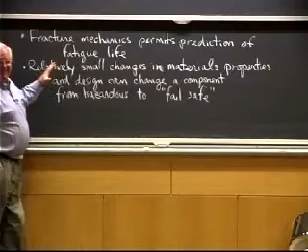I don't care. Fracture mechanics permits the prediction of fatigue life, which we went through last time. Prediction of fatigue life and other types of below-yield fracture is very important because you've got to figure out on what basis you're going to retire a structure from service. I'll talk about that in a bit.

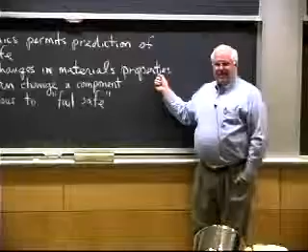But I also gave you the example of the hydraulic cylinder from the America's Cup yacht, where relatively small changes in the material's properties, changing the heat treatment so that the yield strength went from 73 KSI to 63, and the fracture toughness went from 26 to 30 KSI square root of inch, and the wall thickness went from 3 to 4 millimeters.

Those three changes changed the component from something hazardous that could just blast and blow apart in a catastrophic manner, spraying high pressure oil all over and destroying the cylinder so it couldn't operate at all, to one that would leak before break.

And the leak might be small enough that you could still get your sail up and still win the race. Maybe you wouldn't get it up quite as fast, but at least you could get it up. So you'd like things that fail in a safe way.

Now, there's actually a number of different design criteria. One is fail-safe, and another common one is safe-life design. Anybody know the difference between the two?

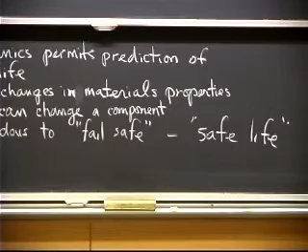Something that fails safe is something that if it fails, the consequences are not catastrophic. For example, if I've got a building with redundant structures, redundant beams, I could lose one of the beams.

In fact, the World Trade Center is not a bad example. They lost some of the perimeter beams when the aircraft went through the outer shell, but the building didn't collapse at that point.

The rest of the beams held it up because it's a redundant structure. There were 262 or 264 beams holding up the building, so if you lost 10 on one side, the building still held up. That was a fail-safe design for the structures.

You have a lot of redundant columns—not beams, I call them beams, but redundant columns—and you could lose a few of them.

One time I had to look at a crack in a 9-foot beam—did I ever tell this story—in the approach to the George Washington Bridge in New York City?

If anyone's from New York City, there are some 20-some story apartment buildings built right over the roadway. If you're driving to the George Washington Bridge, you go underneath these buildings. One time I was asked to come to New York City and look at this 9-foot crack in a 9-foot high beam, one of the beams holding up this building over the roadway.

It was sort of exciting. That particular section of town, I didn't know anything about. I just flew into LaGuardia and took a cab out to the address they gave me. The cab driver dropped me off, I gave him the money, and he sped away. I looked around, and there were all these little plastic capsules all over the sidewalk that had drugs in them. And I'm there with my $3,000 worth of camera equipment over my shoulder, looking around the neighborhood and wondering why the cab driver sped away so quickly.

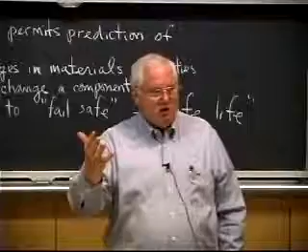But fortunately, it was a redundant structure and a fail-safe design. You could lose one of the beams because there are like 40 of them underneath the building, holding the whole building up. Losing one is not going to bring the whole structure down.

Now, the other thing that's interesting about that story: when they went to tell the tenants about the crack in the beam in the basement, after the meeting, all the tenants wanted to go to the basement and get some of the crack. So, that just tells you a little bit more about the neighborhood.

Anyway, safe life, on the other hand, is when you know that the building or aircraft or car or whatever you're talking about has a component that is going to fatigue, and you can't really design around it.

Let's take a helicopter, for example, or any aircraft. Helicopters, sometimes they say, are flying fatigue machines. They vibrate a lot, and so you get cyclical stresses, and you know that the potential for fatigue and a crack growing is there.

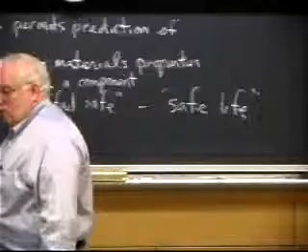And if the crack gets to a big enough size, you want to know about it, and you want to remove it from service before the crack gets too big. Well, that's exactly why these types of plots that I gave you before of crack growth rate are so important.

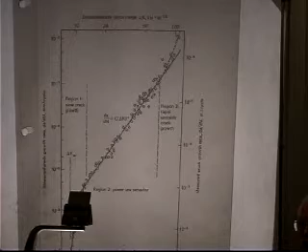Okay, this is the crack growth rate curve, and this goes back to the first one on fatigue. If I know the stresses in the structure, I can predict how many cycles it will take. I just have to integrate this curve, and it turns out you can integrate this curve, and people do it. I've done it.

And you'll find how many cycles it will take, DADN, at a given stress level, for the crack to start from, let's say, 1/8 of an inch in size. Why 1/8 of an inch? Because 1/8 of an inch is a typical flaw size that can be readily detected by most non-destructive testing techniques.

So you take a brand new part of whatever the thing is. What do I have as a part? I guess I'll take a MIT ring, a big MIT ring. So if you have a part, you can inspect it and make sure there are no flaws in it larger than 1/8 of an inch.

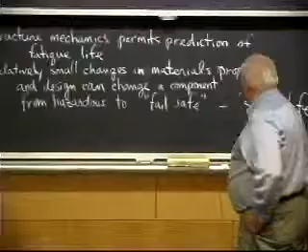You then, if you know what the stress is on the thing in service, can figure out how many cycles it's going to take. You can estimate the number of cycles over a given lifetime, and you can say, okay, I'm going to retire that ring after 40 years. Hopefully it'll be a 40-year, 50-year life, so the person can make it to old age before the ring fails.

But if it's an aircraft component, you may say this part has to be changed every 2,000 hours of operation. That's a safe life type of design. You know that if you run it forever, it will fail.

So you basically put a time limit on it. That's safe life. Fail-safe is, if it fails, there are no catastrophic consequences. And it just depends on the design. Certain things you can design that way, and some things not.

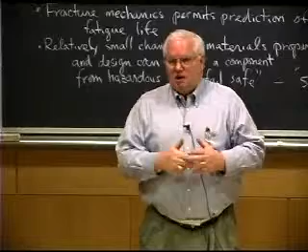For example, medical prostheses—people do spinal fusion. If people have bad backs and the cartilage between the bones gets soft and deteriorates with age, they start having back problems. One of the things surgeons can do is a spinal fusion: they go in, do an operation, roughen up the bone, take out the bad cartilage. The reason they have to roughen up the bone is because bone's a composite material, and the outer surface won't fuse or weld to the other bone, won't grow together, unless you get rid of the top surface layer.

If you're taking the other part of the course and you've gotten to surface contamination, you could kind of consider this that, but you have to get to the soft, spongy inner bone before the cells want to grow back together. Just like your teeth have an outer hard covering but the living part is underneath, bone's similar.

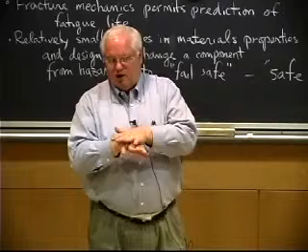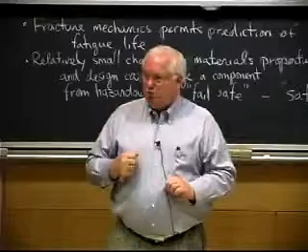So they roughen up the bone and want to clamp it together so it grows back. To clamp it, they use pedicle screws—basically a wood screw, but called a pedicle screw because it goes into the pedicles, these flared bone fittings on the spine. They drill in with a medical drill that probably costs $5,000 rather than $50, then take a screwdriver made of surgical stainless steel, sterilize it in the operating room, and screw the bones together.

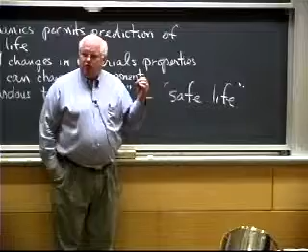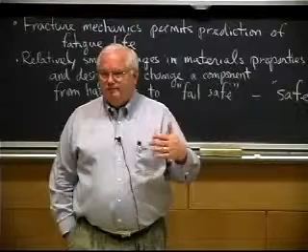The problem is, nature did a pretty good job designing the human body to absorb stresses, but putting a high-stiffness titanium or stainless steel screw into a low-modulus material like bone is an issue. Titanium or stainless steel has an elastic modulus of 15 to 30 million, while bone may only be a couple million to 5 million—much different stiffness.

That puts stresses on the screw, and you know that within 6 months that screw is going to fail under the stresses. You can't put in a bigger screw because nature only made the pedicles big enough for a certain size screw, so you can't lower the stress.

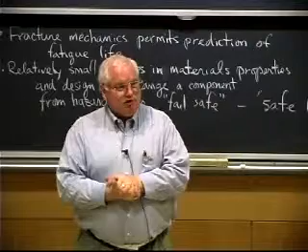You put it in, but expect that if healing goes properly, the bones fuse within 6 weeks, not 6 months, and the stress comes off the screw once the bone grows back together. They call this the implant race—whether the bones grow together faster than the screw fatigues. In the medical literature, it's called the implant race.

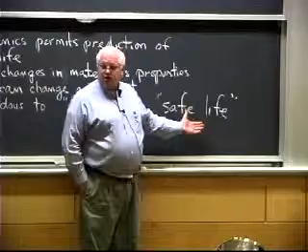If you're a smoker, your bones won't heal as quickly. Anybody know why? It takes oxygen in the blood to heal bones, and smokers have less oxygen in their blood. So they tell you not to smoke.

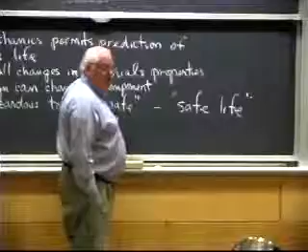Anyway, it turns out 1 out of 6 spinal fusions does not take. That's just the way medicine is—it's not easy to do. So these screws fail, and there was a huge number of lawsuits because 60 Minutes or one of those documentary programs did a piece on it, and suddenly billions of dollars worth of lawsuits followed. If they could have designed a fail-safe screw, they would have, but nature didn't make the human body that way, nor are the material properties suited for it.

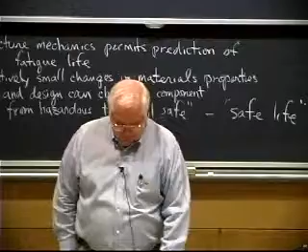So it's basically a safe-life design. Safe life versus fail-safe are two different design philosophies. One is called retirement for cause in the aircraft industry—you retire a part only if it has a flaw or defect. So you do periodic inspections: every 2,000 hours you take the engine apart, or every 30,000 hours you do a detailed inspection of the airframe looking for cracks.

And you only retire the part if you actually find a defect in it.

That's retirement for cause. There's also retirement for time. If the part got to be a certain age, you get to the end of the safe life, and you want to take it out of service and replace it.

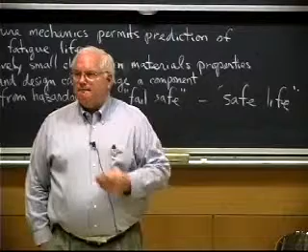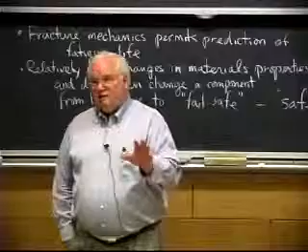Is there a point where it's cheaper to buy a new plane rather than replace all the parts that are getting old? Yeah, and that's not just an airplane, that's a nuclear reactor, a car - same philosophy. However, the cost to build new nuclear reactors and the cost of decommissioning is such that the time frame is getting stretched out further and further. So they do more and more inspection.

For an airplane, typically a commercial jet, it's 100,000 hours of operating life - kind of like it used to be for a car, 100,000 miles was the limit. But there are cars, like Mercedes used as taxi cabs in Belgium, they typically drive them 500,000 to 1,000,000 miles because they can keep them up. They may replace the engines a couple of times in some cases, but it's just a question of the overall economics of the whole thing, and those economics change for all kinds of reasons.

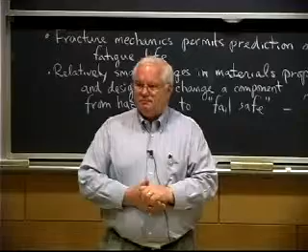Did that answer your question? Where do those old planes go?

Arizona. They stick them in this old unused military air base. If you've ever seen pictures from after the SALT talks, we agreed to get rid of a certain number of our B-52s, and there's a graveyard out in the desert of Arizona where the humidity is very low. This was 10 or 15 years ago, so maybe you didn't see these pictures, but they used to have them in the paper or news magazines - basically so the Soviet spy satellites could take pictures and see that we were dismantling our B-52s. They would take the wings off, so you could see from space that the plane was no longer functional.

However, they leave the parts there for commercial jets, because if you really need a spare part on some of these things, you leave it out in the desert in Arizona where there's no humidity and things don't corrode. The corrosion rate is much, much less in a desert than in a moist environment. So they go and park them there.

Now what do you do with other things - what do you do with a ship when it gets too old? Typically the life of a steel ship, an old cargo tanker, is 30 or 40 years. There's too much, you can't just park them - there's not a graveyard for ships like there is for aircraft. And there's a certain value to all that steel, it weighs enough that there's scrap value. In aircraft, you have the scrap value to the aluminum, and they will get that out eventually, but that's relatively small.

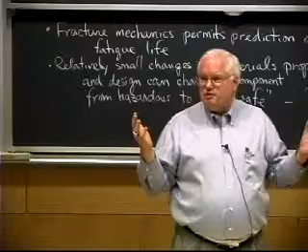A lot of the ships coming in are 30 or 40 years old, full of asbestos. You could never dismantle a ship in any country that cares about the health of their workforce. So you ship it to Bangladesh - literally. The shipping companies have some crew just run it aground on a beach there. When the tide goes out, these guys go in with their cutting torches and truck it off. But you have to remember, it's a country where life expectancy is probably only 35 or so, and people will work for very low wages, because with even lower wages you starve. So you don't have much choice.

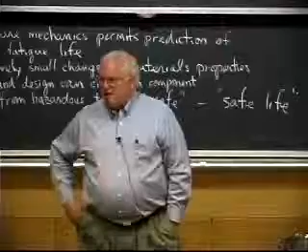Just another example of exporting our environmental problems. If you have an environmental problem, just export it. Let someone else take care of it.

This reminds me, it hit home back in 1992. MIT held the World Economic Forum, which is usually held in Switzerland, and they did this experiment. I was chair of a session that had the Minister for the Environment of Russia. The Soviet Union had broken up, but he was the Minister of the Environment for Russia, and this was 1992. Detente and Perestroika was in 1985, and things were opening up.

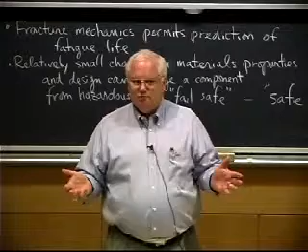Someone was asking him about the tremendous oil pipeline problems in Siberia. Apparently only about half the oil gets through the pipeline because the rest just leaks out into the environment. They didn't have enough money to repair the pipeline, but they needed the revenue from the oil, so they just didn't repair it, and they kept continuously leaking crude oil into the Siberian environment because they need the stuff.

Someone asked him why they didn't do something about this. He said, you have to understand that in 1985, when Perestroika and Glasnost and Detente were all the rage, the Russian people were very interested in the environment. But today, they're only interested in eating.

So if you go back to, anybody know Maslow's hierarchy of needs? You have certain basic needs like food, shelter, and clothing, and if you don't have those met, you can't worry about those things higher in the hierarchy. Well, it's just a better example of that.

We also had the chairman of Tata Steel. The Tata Group is by far the richest industrial group in India, run by the Tata family. They're worth billions of dollars, and in India, billions of dollars is lots of money.

Someone asked the chairman of Tata Steel why they were so environmentally unsound in producing steel in India. His comment was, look, I'm sitting on $5 a ton iron ore, which is very cheap, very high quality iron ore. And India needs foreign exchange, needs to get foreign money so we can improve our country. I am going to sell steel on the international market, no matter what it takes.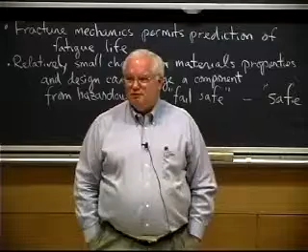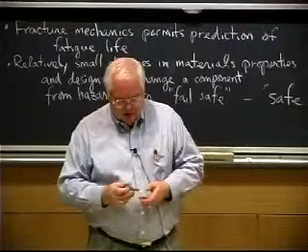So it's basically Maslow's hierarchy of needs. You have to understand that there are different motivations for different people, and a lot of the debates that occur in the world are because people are coming from two different levels on the hierarchy of needs.

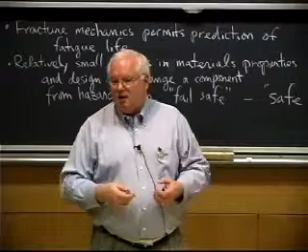Just look at the World Trade Organization, the WTO. The talks broke down, and the poor world countries said they weren't going to be dictated to by the wealthy countries, specifically the United States, and they thought this was great. There's a lot of ego there, but it's also because their needs are fundamentally different than ours, because we're at a different level on Maslow's hierarchy.

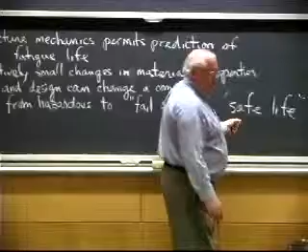So there's safe life and fail safe, two different design philosophies, and both of them work. This is great for companies that like to sell spare parts. This is not so great; you build it once and you just have to go and inspect it.

In both cases, more and more people are trying to extend the time. We're going to talk about non-destructive testing. The reason non-destructive testing is important is because you've got to go in and find the flaws, either when you first manufacture it, to make sure you don't have big flaws that lead to early failure, or you've got to periodically go in and do the inspection.

And they do it both ways. So you can say there's, they go in there and do that inspection on these types of things.

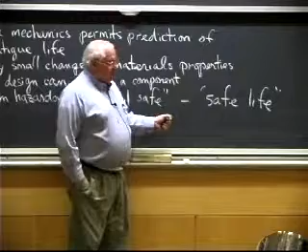The Sioux City, Iowa crash was caused by a big flaw that wasn't caught in the initial manufacturing inspection, and led to a failure before the safe life time limit. They probably would have taken it out of service, but I don't know specifically on that one. I didn't work on it.

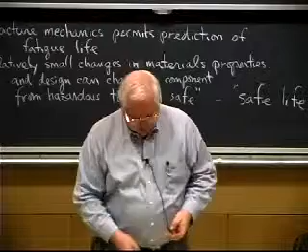But to show you the difference between brittle and ductile fracture, this is a tensile specimen from a piece of steel, and this shows ductile fracture. I don't have a brittle specimen, because well, there is such a thing as brittle steel. Actually, I may be able to find one, but this one has stretched down, we call it neck down, and pulled apart, and when it pulls apart, it ends up with a characteristic fracture we call cup and cone. I don't think we need to go through the details of why you get cup and cone.

So this is a strength test for the force of fracture. They've been doing that for over 100 years. This is a Charpy specimen, C-H-A-R-P-Y, named after a French metallurgist of 1900 who invented it. Basically you take a 1 centimeter square by, I think, 10 centimeter long bar of steel, and put a little 2 millimeter notch in it, and whack it with a hammer.

But it's a controlled hammer. It's on a pendulum, and you know the weight of the pendulum, and you hit it, and you can see where this one got whacked from the back side. They call it the tup, or the end of the hammer, T-U-P, which hit and embedded itself in here.

And this steel was nice and tough, a lot of energy absorption. You basically measure the pendulum and find out how far it swings back up. If there's no specimen there and you take a 264 foot-pound energy pendulum, it swings all the way up, except for the friction in the thing, which is near zero, to the same height that it started from, right?

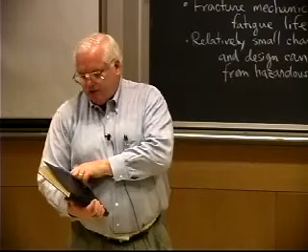So I brought you this. Actually, MIT Libraries gets rid of their old books. This is the 1946 book, which was the investigation on the design and methods of construction of welded steel merchant vessels, a report of an investigation. I told you right after World War II, people were interested in fracture toughness of steels because ships were splitting in two. And this is the famous picture of the Schenectady at dry dock.

If you look on the page before, here's a ship that split completely in two. Now, some of these did it in the North Atlantic, and they're sitting at the bottom of the ocean with some of the people. And here's the big brittle fractures.

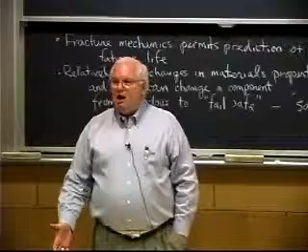Lest you think that this no longer happens, I could have brought another book on fracture mechanics that shows the exact same thing happened in the North Atlantic in 1979. There's a Kuwaiti tanker, I think, or maybe Brunei, or anyway - it was an oil tanker that just split completely in two.

And they actually recovered it, because when these things split in two, if the seas aren't too rough, they just kind of split like this, so the fractured open end is facing up to the sky, and the other end is sitting down low in the water. But in any case, brittle fractures still occur. The Northridge earthquake I mentioned.

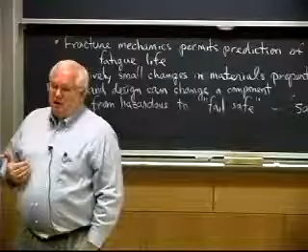So it's not as if we've gotten around it. We've done a lot, and we don't have as many failures, but we still have failures. And one of the reasons they hadn't had ships fall apart like that before was because... does anybody know the reason?

It's because they weren't welded before World War II. They weren't all welded construction. They did actually have a very famous ship failure in the first part of the 20th century that was due to brittle fracture, they now know. Anybody know which one I'm talking about? The Titanic. But those were riveted plates.

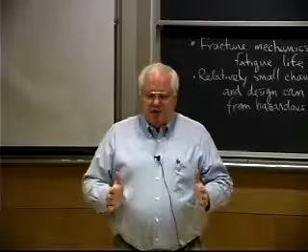What would happen typically in a riveted structure, if you got a brittle fracture—and they did get brittle fractures because the steel was lousy quality back then too, before World War II—the crack would run through the plate, and it would stop at the end of the plate, and it wouldn't keep running because it wasn't a continuous plate. So when you had riveted structures, it would just crack through one plate, and you'd have essentially a fail-safe type of design. You'd only have a small hole in the hull of your ship. The whole thing wouldn't split in two.

If you weld the whole thing together, though, now the crack can run between plates, and it runs all the way around. So it was when they started to completely weld the ships that you could get long cracks. And some of these cracks can get to be very long.

There have been brittle fractures in oil pipelines, or gas pipelines—it would occur in a gas pipeline. There have been brittle fractures in gas pipelines that have run for 30 miles. That's a very expensive break, because once it starts running...

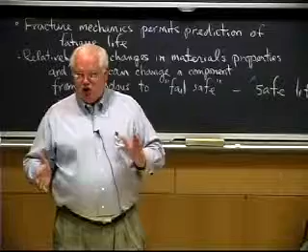The reason it's more insidious in a gas pipeline than an oil pipeline is because of the speed of sound. A brittle fracture runs at something close to the speed of sound, about half to two-thirds of the speed of sound. Well, what's the speed of sound in a solid? It's around 3,000 to 5,000 meters per second. That means this crack is running at about a mile per second. That's fast.

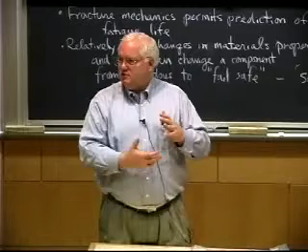And it turns out the decompression velocity of a liquid, if I have a rupture, is a similar order of magnitude in speed. So basically, if the crack slows down for any reason, the stress of the pressurized liquid will dissipate itself because it decompresses at about the same rate the crack is growing. So typically, you get a rupture of a liquid pipeline, whether it's oil or gasoline or water or whatever—the crack just runs for a few pipe diameters in each direction, and it stops because the stress that's driving the crack is relieved by the decompressing liquid.

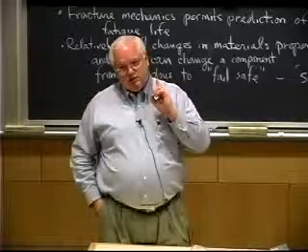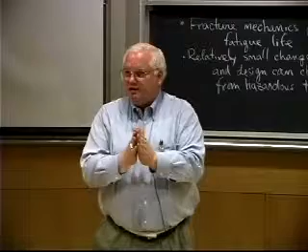The problem is the speed of sound in a gas is about an order of magnitude less than in a condensed phase like a solid or a liquid. Why is that? Because the atoms are further apart in a gas. If the atoms are close together, they interact, and the speed of sound is basically limited by how fast the atoms can reach each other.

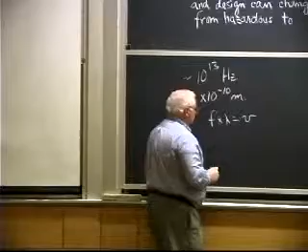The typical vibrational frequency for a solid material is something on the order of 10 to the 13th hertz. So if I've got 10 to the 13th hertz as the speed of vibration of two atoms, and they're separated by one atomic distance, which is on the order of 2 times 10 to the minus 10 meters—angstroms—and I multiply these two together, so frequency times wavelength equals velocity, I get, lo and behold, 5,000 meters per second.

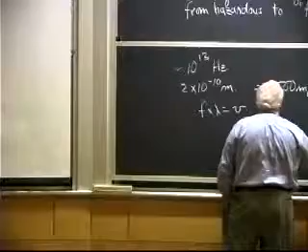Did I do that right? Or 2,000 meters per second—right, 2,000, if I'm multiplying. So the distance of separation of the atoms is really 3 angstroms, I get 3,000 meters per second—the speed of sound in a condensed phase. Okay, just order of magnitude analysis.

In a gas, it turns out the atoms aren't vibrating or moving any faster—they're actually moving at the same speed if you go through the kinetic theory. But the problem is they have to go about 8 to 10 times as far at room temperature. Why do I know it's 8 to 10 times as far?

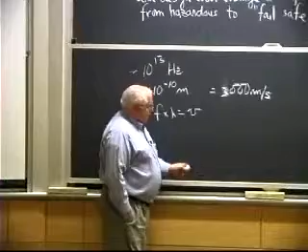Because the density of a gas—if you take a liquid, take water, and vaporize it, you could vaporize it at room temperature just by lowering the pressure. If you put it in a vacuum, it would vaporize. But in any case, at typical pressures, the density of the gas is about 1/500th the density of the condensed phase. The volume is 500 times greater at room temperature.

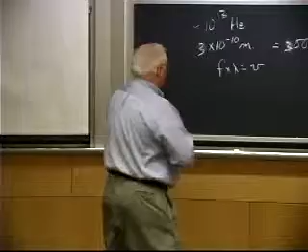So what's the cube root of 500? It's about 8. So the distance of separation in a gas is about 8 times—the molecules are 8 times as far apart in the gas phase as they are in the condensed phase. And therefore, the speed of sound in the gas phase is this number divided by about 8, which in air at room temperature is 343 meters per second. That's not exact, that's approximate, but we're coming up with similar types of numbers.

So in any case, what happens in a gas pipeline is because the gas doesn't decompress as fast as the crack is growing. If the crack is growing at 1,000 meters a second, but the gas is only decompressing at 300 meters per second, that crack sees full gas pressure all the way along. So the brittle crack runs for 30 miles in a gas pipeline, whereas in a liquid pipeline, it only runs for a few feet. Just differences in dynamics.

The point of all of this is you actually should know a lot of these types of numbers, or be able to calculate them, to do these types of estimations. I don't remember all the numbers, but I know where they come from, and when I have to, I can go back and do the order of magnitude analysis. So an important part of engineering is learning to do estimations of things. Questions on any of that?

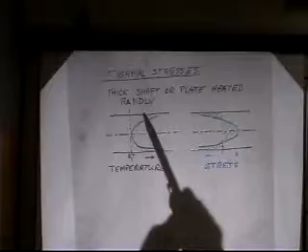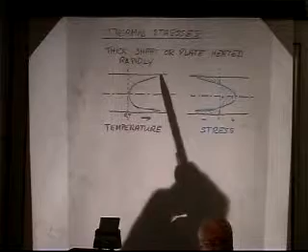In any case, if I have a thick shaft or plate and I heat it rapidly, there's going to be a temperature gradient. So if this is room temperature and the heat starts to diffuse in from the two surfaces, it's going to be hot on the surfaces and the heat's going to diffuse in. The center will remain cold and the surface will be hot. The stress, because the material wants to expand when it's heated, is going to be compressive on the outside surface because the material is all stuck together. So I get compressive residual stresses on the outside surfaces, and I get tension on the inside.

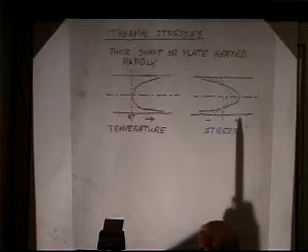Later I'll actually show you a failure of a ship component that was caused by that. Turns out this tensile area here, underneath this part of the parabola—this is zero stress—the positive stress area must be equal to those two areas in order to balance the forces. So you can calculate all these things as far as that goes.

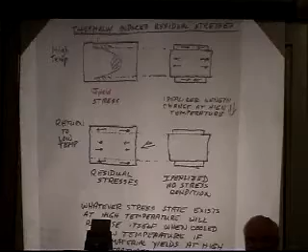So now, understanding that part, you can go and say, well, what happens to create thermally induced residual stresses? I talked yesterday about mechanically induced residual stresses, where you actually deform the surface, and the compressive forces lead to a compressive force on the surface, which is an advantage—it produces the fatigue strength improvement, since fatigue cracks start on the surface.

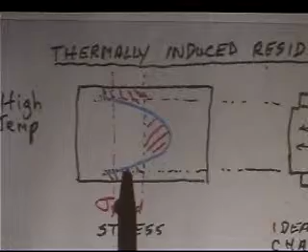But thermally induced residual stresses put things the other way. It's always very confusing to me and to students to figure out which way the stress is going, because if you start thinking about what happens at high temperature, you have this stress state—the same one I drew before—where you have compressive stresses on the surface because of the temperature gradient: it's hot on the surface and cool in the center. So I get tensile stresses in the center, compressive stresses up at the surface. If I magically were to cut the material from the surface where it's compressive, I recognize that I can induce yield level stresses in the material with relatively little temperature difference.

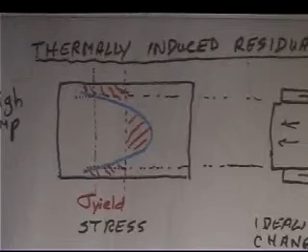How much temperature difference? Well, we can calculate that. A typical thermal expansion for a metal is 10 to the minus 5 per degree centigrade for most metals. Not for every metal, but you know, steel, copper, aluminum type of structural material. So 10 to the minus 5 per degree centigrade.

What is the typical value of strain for yielding of a material, all you mechanical engineers? When we do a stress strain curve, and you go up here and you say, what's the offset to define yield? What offset of strain do we use?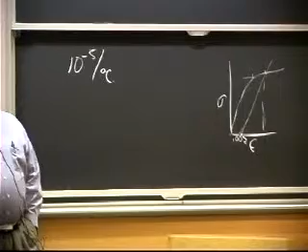0.2%, 0.002 as a fraction, 2 parts per thousand of strain. It actually may be 4 parts per thousand when you actually take the modulus in here, but you would basically draw a parallel line, and come back here and say when the material has stretched beyond its elastic limit by 0.2%. Some people use 0.5%, but in any case, so I multiply that by...

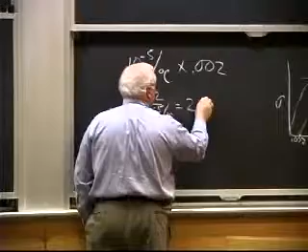Oops, I don't multiply, I divide here. 0.002 divided by 10 to the minus 5 per degree C, and I get 200 degrees centigrade temperature change, because the change in length is equal to the change in temperature times the coefficient of expansion of the material, right? So if I want to know delta T, I just take my change in length for yield and divide by the coefficient of expansion. I get 200 degrees centigrade, will put me in 2 to 3, usually I just say 200 to 300, will take me to yield level stresses in the material.

It does not take a very big temperature differential. It's not 1,000 degrees. Several hundred degrees of temperature will produce yield level residual stresses in most materials, most common materials. Not in quartz glass, which has a 10 to the minus 6 coefficient, okay?

That's why quartz, you can take quartz out of the oven and quench it in water. That's why you can take Vycor and some other things. Some materials have very low temperature coefficients of expansion, and therefore they can take a lot of thermal shock, okay?

In any case, if you take a metal and you heat it up, it will reach its yield stress when the temperature differential is only about 300 degrees. And if I could magically cut the material in two, the material here that yields on the surface would shorten its length because it's yielding in compression. This material is in compression when it's hot, so it shortens its length. So if I just think idealistically, the material in the center wants to elongate, but it's not above its yield stress.

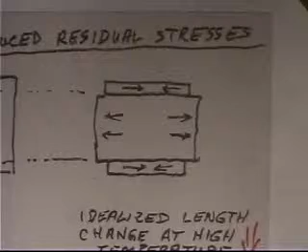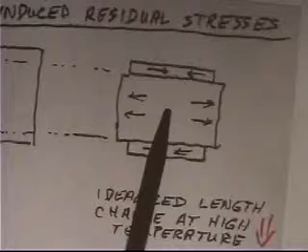But the material on the very edges, which is a higher temperature gradient, will actually compress. It will yield. So this material yields, and it's balanced by the forces of tension in here, but this material in the center doesn't yield. I yield the material on the surface in compression, and it yields in compression, which shortens its length.

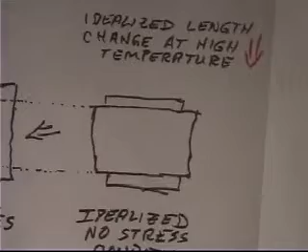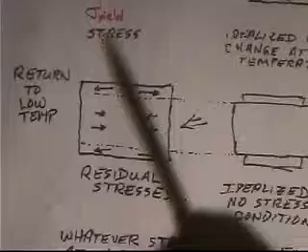I cool everything down, and now effectively, if these things weren't welded together, the material on the surface is shorter in length than it was originally when I started out. If it's shorter in length, but in fact it's still bonded to the internal material, I will end up with tensile residual stresses because in order to bring this shorter surface material back to the original length - because the thing still hasn't actually separated, this is just to show you conceptually - I end up with tensile residual stresses.

The key to all of this, and I've never found it to fail, is whatever stress state exists at high temperature will reverse itself when cooled to low temperature. So all you have to do is figure out for a various complex geometry part which direction it wants to bend at high temperature, and then at room temperature it will have the opposite stress state, okay, because it yields at high temperature, it shortens its length, and that's going to cause it to bend back the other way and end up in tension when it's all said and done.

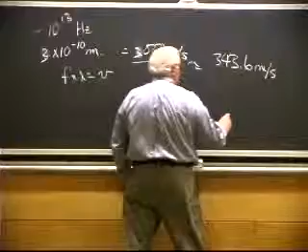Now, why is that important? Well, anytime you weld, you're thermally inducing residual stresses. What were some of the stresses in the ship plate? Thermal stresses. We talked about the fundamental equation of fracture mechanics that K is equal to sigma square root of pi a.

And the problem is, you can calculate what the service stresses are by finite element analysis. You can't calculate what the residual stresses are very easily.

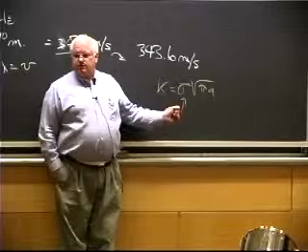It turns out the world's biggest computers still cannot solve the thermoelastic plastic mechanical problem with the accuracy we need to calculate residual stresses. You can do it in simplified geometry with lots of symmetry, but for a real part of complex geometry, you cannot calculate residual stresses. You still have to measure or experience them, and it's not easy to measure them in a non-destructive way.

Residual stresses lead to lots of brittle fractures, like the Liberty ships, like the Northridge earthquake buildings. Residual stresses can potentially be additive in terms of fatigue life.

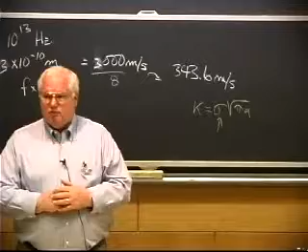If I set up compressive residual stresses on the surface by shot peening the surface of something, that's going to improve the fatigue life of the part. If I shot peen the surface and deform it locally, that sets up compressive stresses on the surface mechanically. I can double or triple my fatigue life for that component.

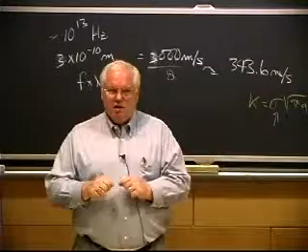My only problem is if someone comes along and breaks through that layer, I'm down into a region of tensile residual stresses. There are some heat treatment processes that I might do instead.

For example, the crankshaft of a high quality engine, such as might go in an aircraft for a private plane - the crankshaft is a very complex shaped thing that... well, I probably shouldn't even try to draw it. Forget it, I'm not even going to try to draw a crankshaft.

Let me draw the mains. Here's the main bearings, and then you're going to have the rod bearings at different levels, all connected by different materials in between. That's a main. If this is an engine, you'll put a propeller out here, and a gear on the end. This is a 2-cylinder engine crankshaft - these are the main bearings, and here are the rod bearings for the connecting rods of the piston engine.

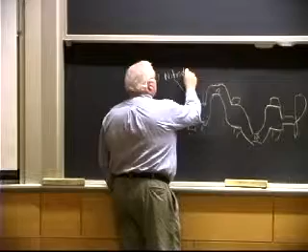It's a very complex part, and you want good wear resistance. You also want good fatigue life, particularly if you lose one of these things up in the air - it's not good, it'll drop like a rock. So for wear resistance, they nitride the case - this is a steel part, and they take an ammonia atmosphere and diffuse nitrogen into the surface.

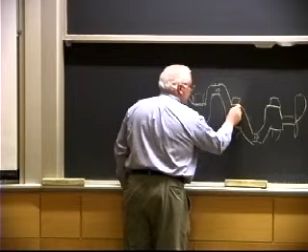As they diffuse the nitrogen, it expands the surface and gives you very favorable compressive stresses. But if I get compressive stresses on the surface, you'll get tensile stresses underneath, because you got to balance the stresses, right? If I've induced compressive stresses on the surface, which is good for fatigue, I'm going to have tensile stresses just beneath the surface, by a couple of millimeters.

And it turns out both of the big engine manufacturers over the last 5 or 10 years have been having tremendous problems with these tensile stresses and some heat treating defects that occur beneath the surface. The fatigue cracks start 2 millimeters beneath the surface, not on the surface, because you got a good nitrided case. If you didn't have that nitrided case, you'd have a third less fatigue life on a good crankshaft. But unfortunately, when people forged these crankshafts, they overheated them and produced little flaws only about 100 microns in size.

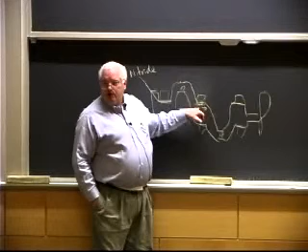But those flaws, if they're right on the surface, are not harmful because they're in a compressive stress state. But when you add the tensile stress state right beneath the surface to the operating stresses, that flaw size gets large enough that you get fatigue cracks. And these crankshafts are failing in service.

It's a big problem. Don't fly in small planes for a few years. Well, it's okay to fly on the commercial ones where they have Pratt & Whitney engines, but be careful about Textron Lycoming engines, Teledyne Continental engines, and AVCO Lycoming engines - they're the ones who have the problems.